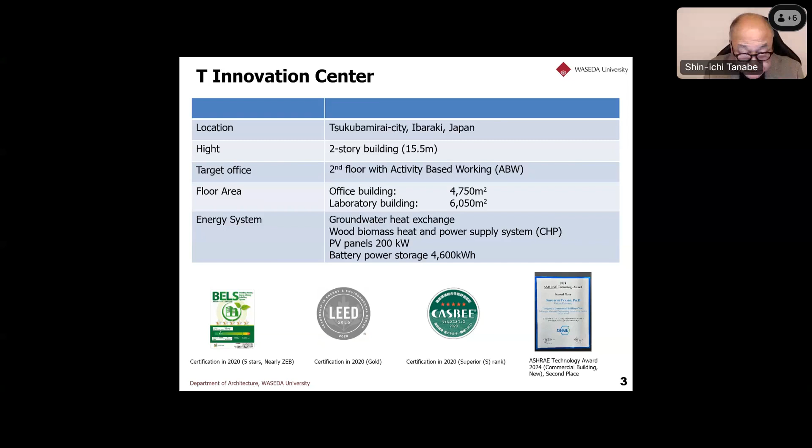So here's an overview of strategies towards carbon neutrality and zero energy building. To simplify, I will explain in terms of 4 key points: 1, architecture plan, 2, heat source and energy plan, 3, indoor environment planning, and 4, contribution to the community and transfer of the technology.

The blue one is the design incorporating natural ventilation and daylighting while achieving solar shading and high thermal insulation. Point 2, the pink one, renewable energy is a key focus with the introduction of biomass gasification power generation, solar power generation, and large-scale storage batteries. Groundwater is also used for air conditioning.

The green one is PECS. An indirect lighting system and natural ventilation are employed. The 4th point is the brown one. The garden surrounding the center is open to the community, and the cafe inside the building serves as a communal communication space.

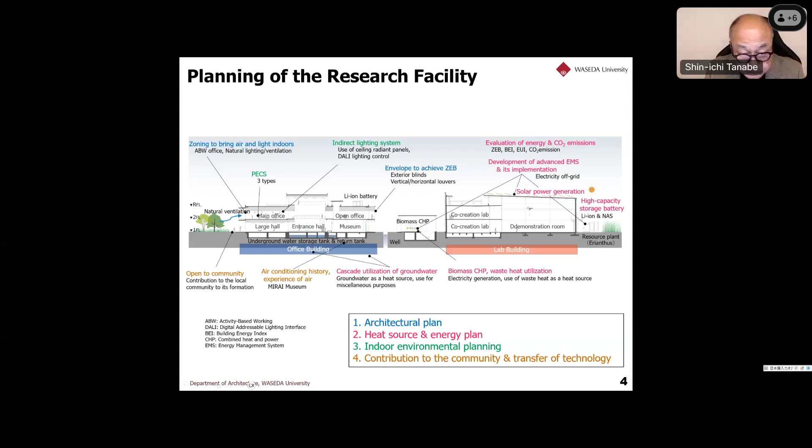So I'm talking about the office building from now. This is the net zero energy system. The solar panel is 200 kilowatts, around 2,000 square meters. And we also installed biomass CHP, 40 kilowatts for 2 units, a wood chip fuel combined heat and power system.

Sunlight is converted through the PV to electricity, wood chip biomass provides heat and cooling, and groundwater is used as cool water. For storage, we have a lithium-ion battery that is really big, a 430 kilowatt hour battery, and also a NAS battery, so we have different kinds of battery systems in this building.

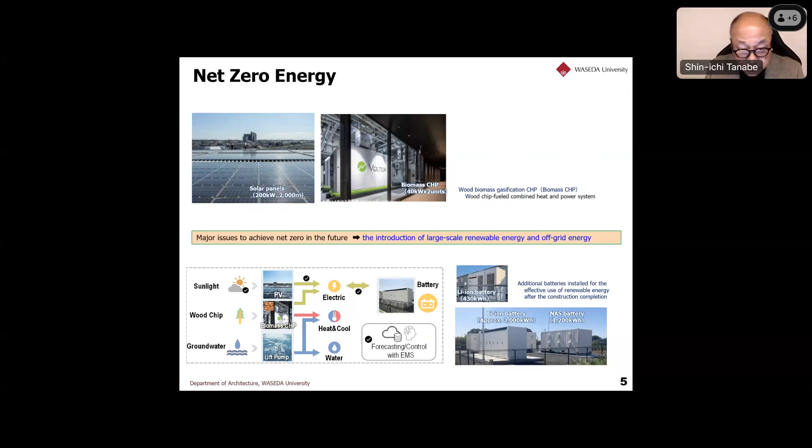And this is the energy consumption simulation for the office building. Based on ASHRAE 90.1, the standard value is 421 megajoules per square meter per year, but the design value is minus 130 megajoules per square meter per year, achieving 131 percent energy saving compared to the ASHRAE standard value of 421.

When operating one biomass CHP unit, a post-completion survey in fiscal year 2021 revealed that continuous operation improvements resulted in an additional 14.3% energy reduction. Including electricity from the solar panels and the two biomass CHP units, primary energy consumption is minus 263 megajoules per square meter per year, achieving 162 percent reduction from the standard value, also resulting in net zero emissions.

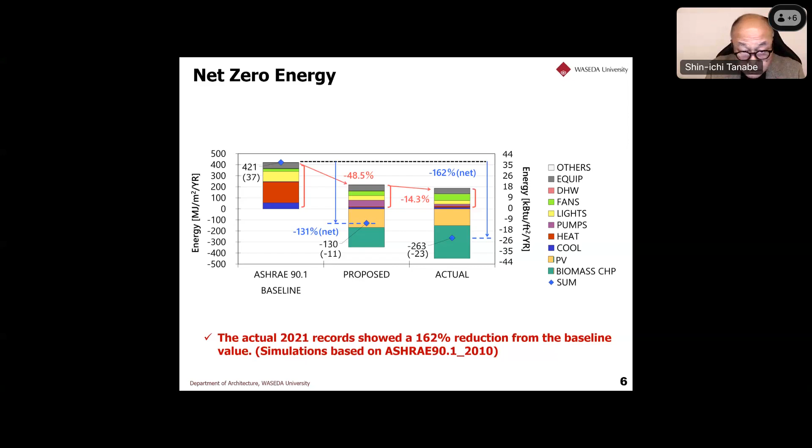Outdoor air is supplied indoors after temperature and humidity adjustment with the DOAS system. The building sanitation code we have in Japan requires keeping the CO2 level below 1,000 ppm. Sensible heat loads are managed by fan coil units, ceiling radiant panels, personal air conditioning, and hot water floor heating.

Numerous human position detectors and thermopiles are installed on the ceiling and monitored via a central system. Indirect lighting and daylighting control are employed for comfort and energy saving. Here, three types of PECS are applied: a ceiling-mounted PECS system, a partition PECS system, and a desk PECS system.

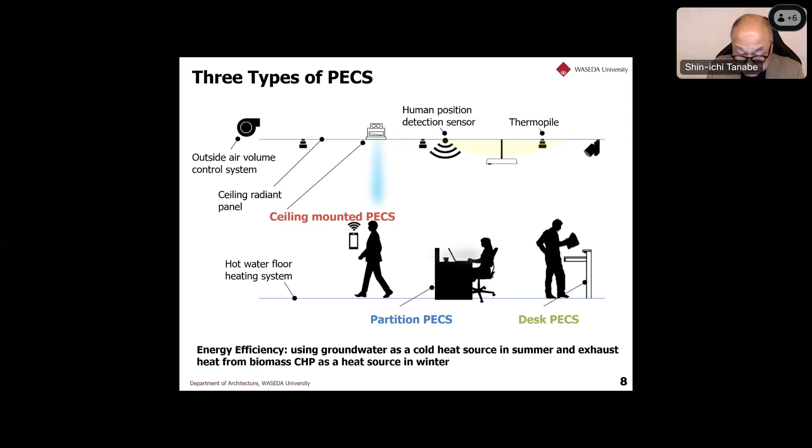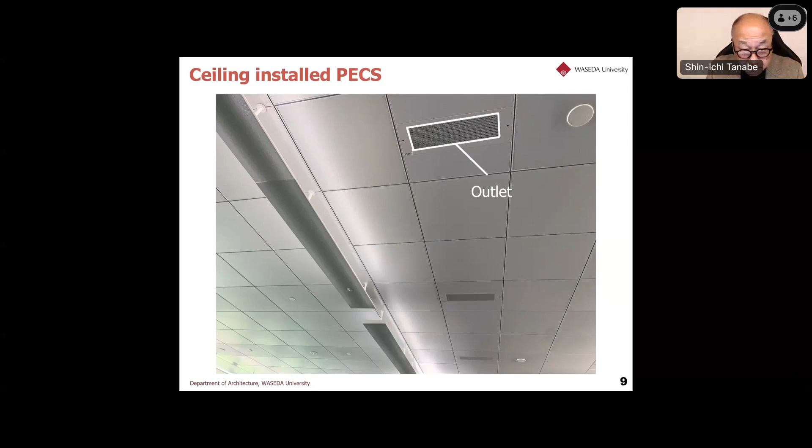I will explain in more detail. This is a ceiling install PECS system. So the surface is a radiant cooling and heating system. And for the ceiling install PECS system, we apply a DC fan with 3.1 watt. It's very low energy consumption for the fan.

And inside we have a cooling coil and also an electric valve. So the outlet maximum air volume is 236 cubic meters per hour. So maximum cooling capacity is 470 watt. Also a mobile phone can operate on and off and other controls for each PECS system.

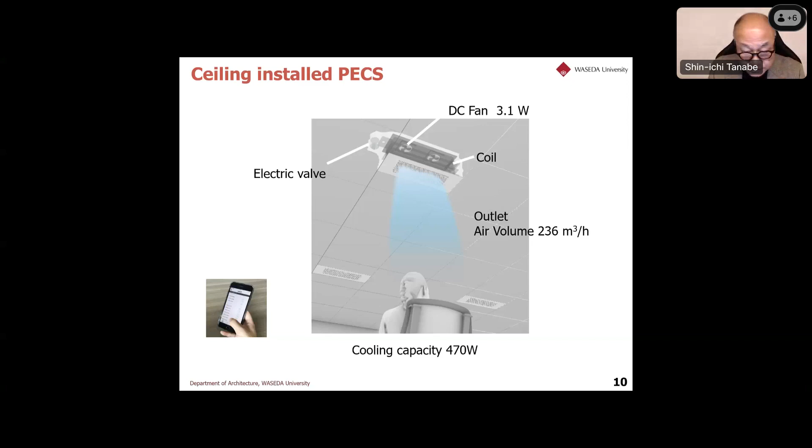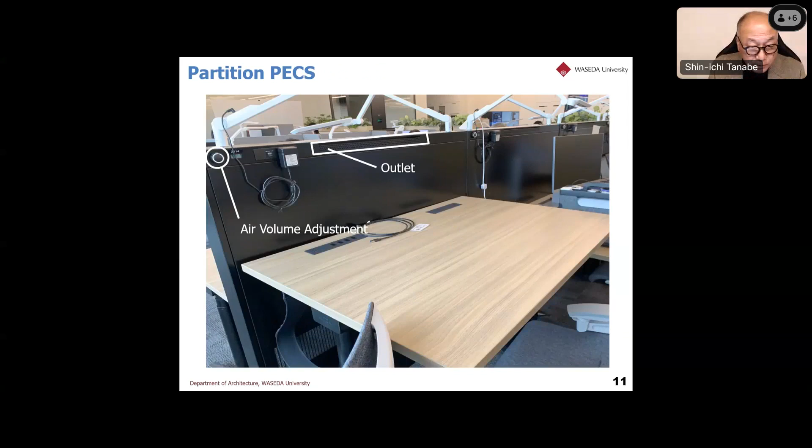So this is a partition PECS system. The outlet is above the desk from the partition, and also air volume adjustment is on the left hand. So this is the partition PECS system. The outlet air volume maximum is 130 cubic meters per hour. So air volume adjustment, and also we are using a DC fan. So only 6.6 watt for the fan.

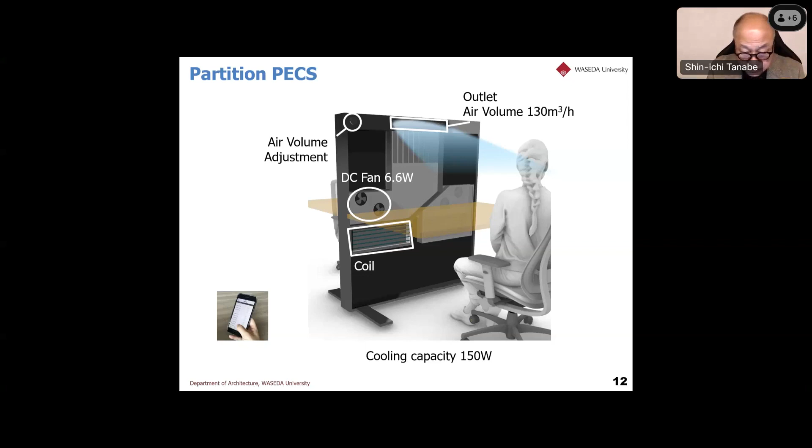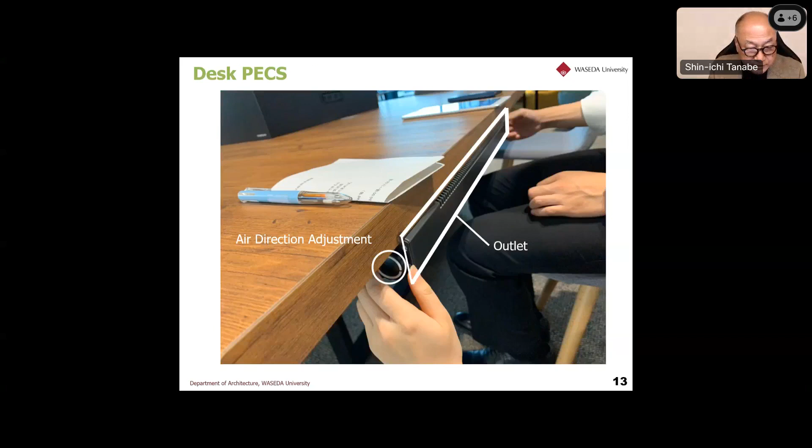And also a cooling coil is installed in the partition. And this partition is possible to operate with a mobile phone, and also easy to use. And the last one is the desk PECS system. So this is simple. We installed the outlet under the desk, and an air direction adjustment system is installed.

So air direction adjustment is easy by manual operation, and the DC fan is only 1.9 watt, and the cooling and heating coil is inside. So outlet air volume maximum is 50 cubic meters per hour. So cooling capacity maximum is 70 watt. So also this one is possible to be controlled by the mobile.

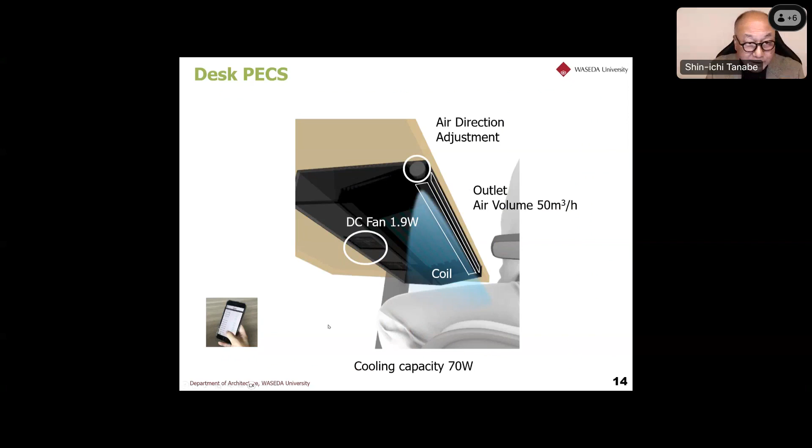Here's the office building plan, the second story. So there are 4 zones, A, B, C and D. Zone A is more comfortable condition control. So here, ceiling unit, we put 57 units, partition 30 units, and desk is 28 units.

So zone B is something like an adaptive place. It's a more wide range of temperature and humidity. So ceiling 34 units, partition 10 units, desk 18 units. So zone C is also more rough control of temperature and humidity. So ceiling 36 units, desk 8 units, and zone D, we installed only the ceiling PECS system, so 38 units there.

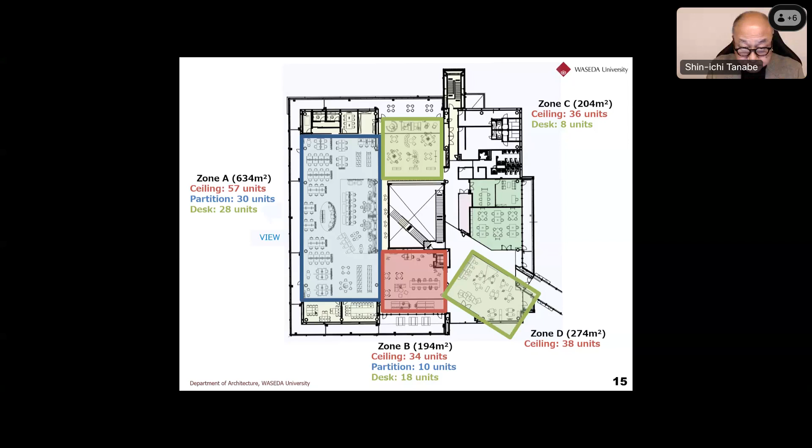We reported the seasonal usage rate of the PECS system. We investigated year round. So people use it during the summer. The usage rate is higher during the summer season, and they like ceiling and partition and desk systems. So during fall and winter, I think they use this PECS system for the heating purpose,

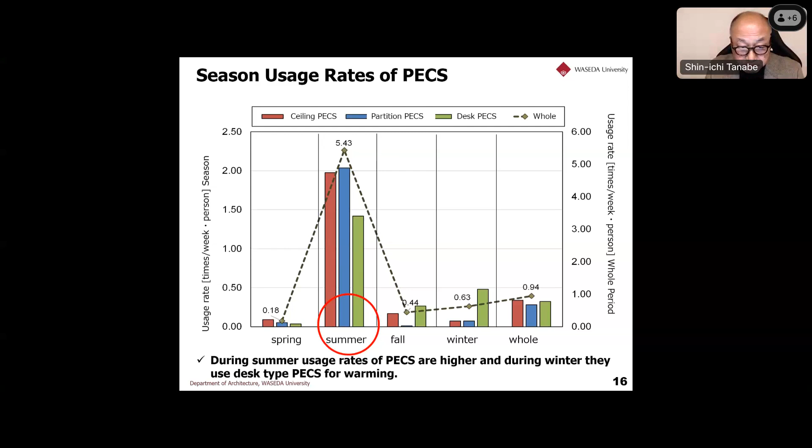the personal PECS system. And the daily usage rate of the PECS, as I told you, usage in summer is more than other seasons, and they use it in the morning. So when they enter from outside to go to the company, 8 o'clock, 9 o'clock, they use the PECS system in summer. And also you can see after lunch, probably the metabolic rate is higher after lunch, so they prefer to use the PECS system. So this is more used in the morning and after lunch due to the high metabolic rate.

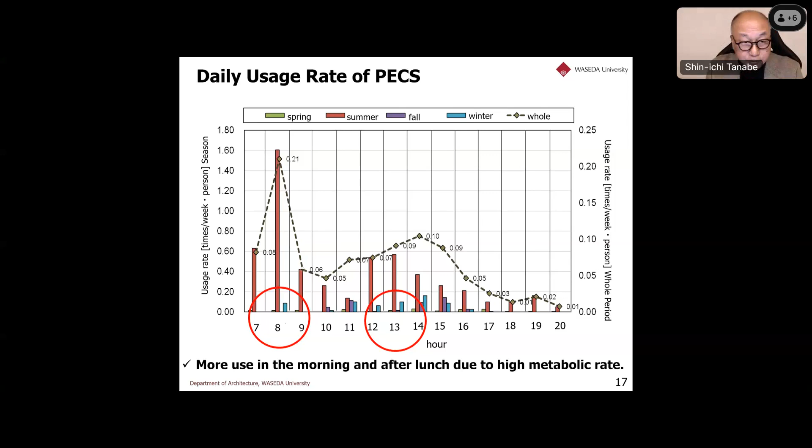This is the ambient summer condition compared with zone A and zone B. So zone A is an office space, and zone B is a buffer office space. I told you it's slightly rough temperature control. So in zone A, during the summer, the PECS is used between 26 and 28 degrees, and in the buffer office space during summertime and wintertime, they use this kind of system. So depending on ambient conditions, people use the PECS system in different ways.

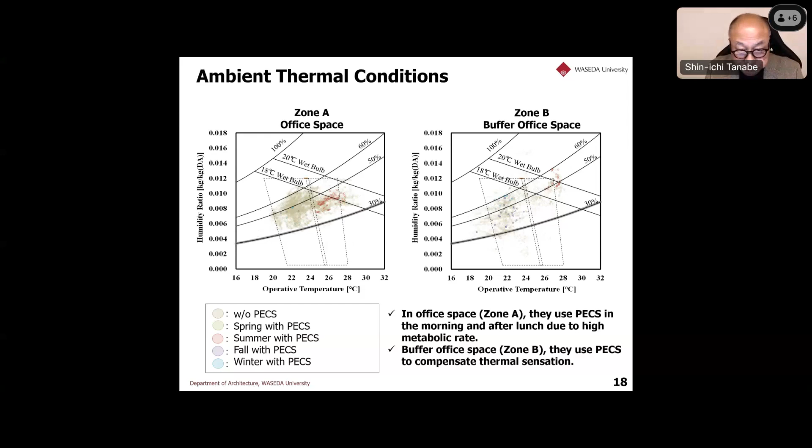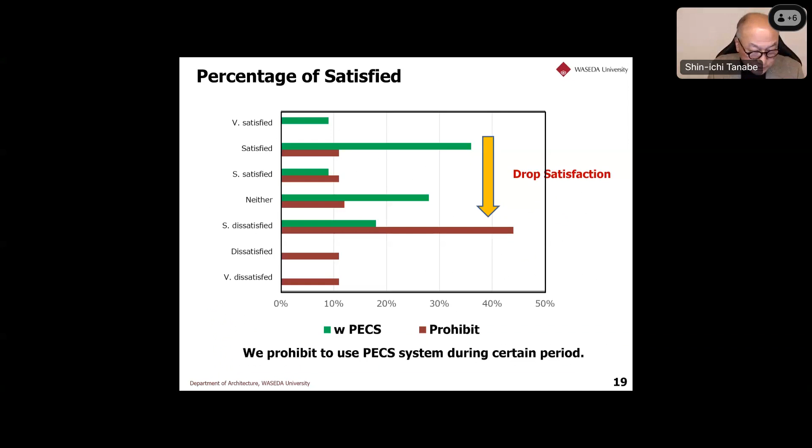And once we prohibited use of the PECS system during a certain period, they complained. So we investigated prohibiting it during a certain period. The figure shows the percentage of satisfaction. Without the PECS system, satisfaction level dropped significantly, and they reported being dissatisfied without the PECS system.

Well, this is the conclusion. So the T Innovation Center opened in January 2020 in the office building, and net zero energy and emission were achieved in 2021. The 3 types of PECS were installed in different areas. So system specification and usage pattern were investigated. During summer, PECS usage rates were higher, while in winter, desk type PECS provided heating.

PECS usage increased in the morning and after lunch. In zone A, PECS addresses metabolic heat, while in zone B, it compensates for the thermal sensation. So prohibiting PECS usage significantly increased the dissatisfaction level. Okay, this is my conclusion.